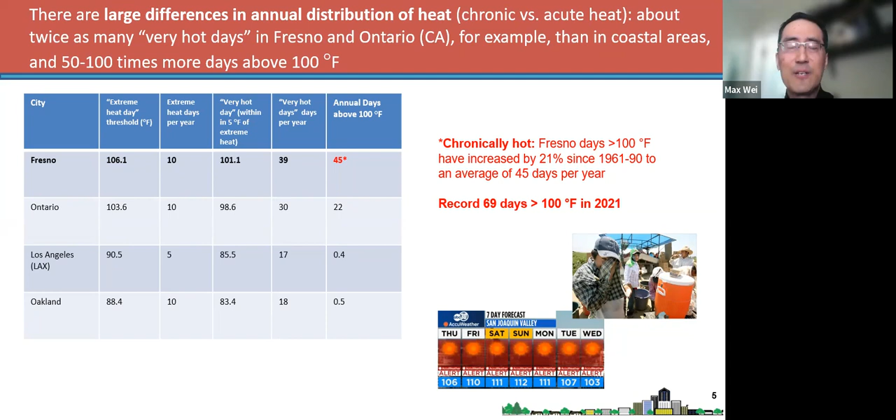So the good news is that we can implement preventative strategies now to mitigate heat health impacts. And the Cal-THRIVES project has developed a toolkit for local and state stakeholders. In the short term, this can include increasing awareness of heat-related vulnerability and identification of areas that are vulnerable to extreme heat events. And in the nearer to medium term, we can remedy the built environment.

That is to say, we can retrofit buildings with more insulation and/or more energy efficient cooling equipment, and perhaps increases to the tree canopy. We can also try to enhance community and home cooling programs. Specifically, I'm referring to community cooling centers, which are publicly available shelters, which might be a library or community center, which are open to the public and air conditioned, that people might turn to if they lack sufficient cooling in their home.

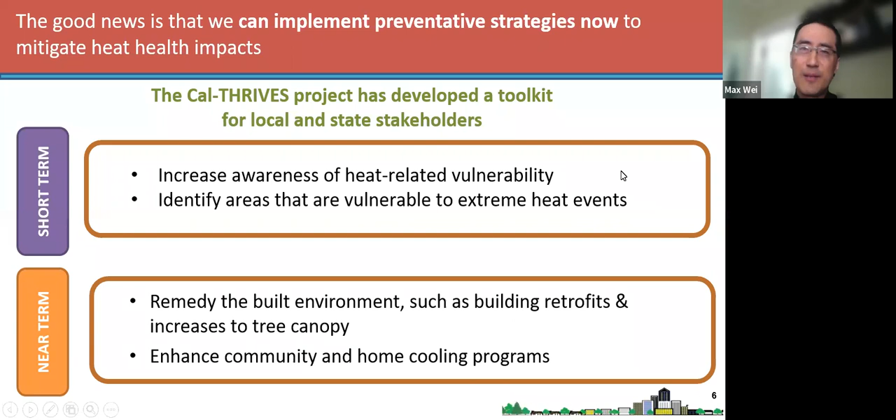So our approach is to incorporate both community inputs and science. Community engagement is an important piece of the project. I'll discuss that a little bit more. That can inform, for example, how cooling centers could become more optimal. And we also included neighborhood scale building modeling and outdoor measure modeling, which I'll describe in a moment.

But all these factors feed into our heat resilience toolkit output, which includes many items, including a community cooling guide, fact sheets. I won't read all these items, but they also include policy and program recommendations. I won't have time to get to all of these, but I just wanted to mention that we have several items of the heat resilience toolkit.

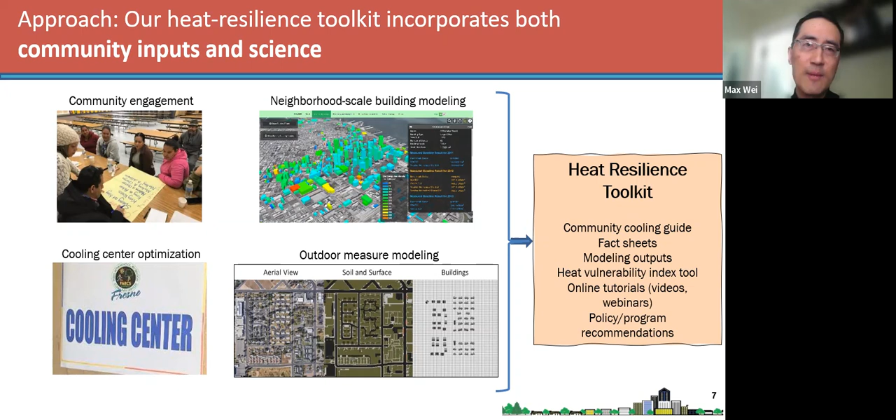So community engagement, as I mentioned, was a very important and key part of the project to help us understand how residents cope with extreme heat, to better understand residents' needs, preferences, and barriers to proposed cooling strategies, such as going to cooling centers or installing solar window films, for example, and also to inform our modeling assumptions, for example, what types of cooling equipment and how old is their air conditioner or swamp cooler.

To do this, we employed 4 primary outreach methods. This was led by Susan Mazur-Stoneman, our social scientist, and also West Fresno Family Resource Center, our community-based organization partner based in Fresno. So we had 2 community meetings, one at the beginning and one at the end of the project, 4 focus groups, 11 in-home interviews, which are very in-depth. And I should say that the focus groups and in-home interviews were conducted just before COVID. But after that, we primarily went to remote outreach with about 88 phone interviews.

So we modeled both active and passive measures, and the passive indoor cooling measures were modeled in a worst case heat wave with and without grid power available. They included several window treatments, such as window blinds and the aforementioned solar control window films, which provide some tinting to your windows. And then also some cool surfaces and roof treatments, including cool roof, which basically provides greater reflectivity of sunlight from your roof or wall. Also roof insulation and radiant barrier, and also natural ventilation, which is basically opening windows and/or doors to admit cooler air, primarily at night.

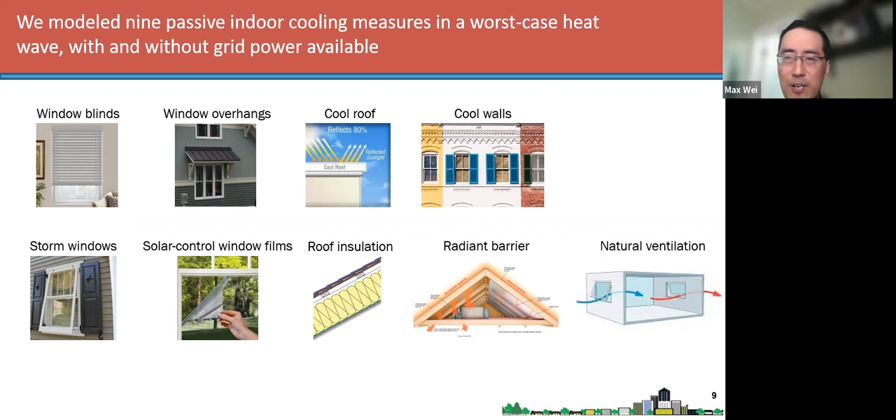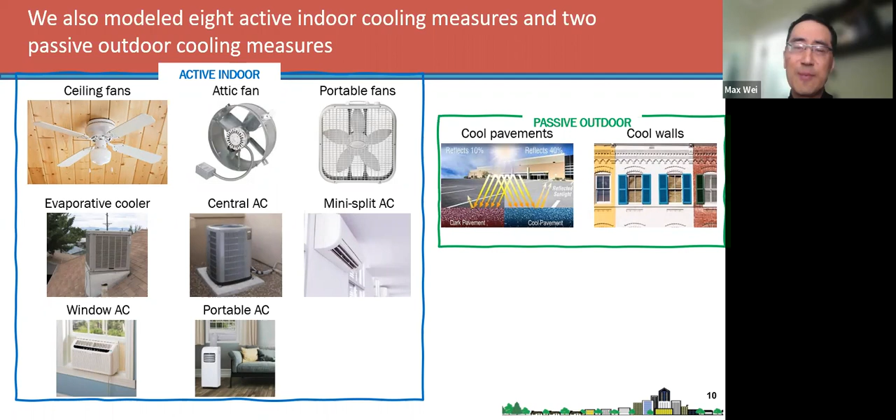We modeled 8 active indoor cooling measures additionally, and 2 passive outdoor cooling measures. So the active cooling measures included fans and evaporative or swamp coolers, and 4 different types of air conditioners as shown. I won't really be discussing the outdoor modeling as much today, but we also modeled cool pavements and cool walls, and their impact, for example, on outdoor near-surface air temperature.

For the building modeling, we utilized a neighborhood scale building modeling tool developed at LBL called CityBES. It's available at this website below. It's an open tool for neighborhood to urban scale or district scale modeling, which is to say that it has the capability to model an ensemble of buildings, like for a commercial area, all of the small office buildings, for example, or all of the taller buildings, or all of those buildings together.

And so for Fresno, we have developed a residential building data set for several neighborhoods in Southwest Fresno. For example, you can measure an energy efficiency measure such as insulation or more energy efficient HVAC equipment. And you can look across the set of buildings that get that upgrade to look at the energy savings and the overall energy costs. It can also look at interactions like the shading of a building that might affect the solar PV output from another building.

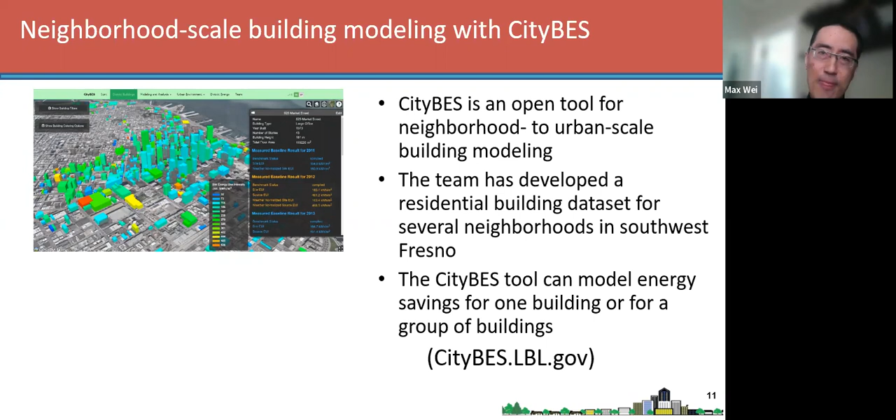So the overall workflow for the two scales of modeling is shown here, which is pretty detailed, and I'm primarily showing this just for reference, so I probably won't go into great detail here. But essentially, we have two scales of modeling at the prototype or individual building level, so single family, 1 level and 2 level, and multifamily 8-unit prototype buildings. And then we aggregate those to model a neighborhood.

So this particular neighborhood is a residential neighborhood, underserved, disadvantaged neighborhood in Southwest Fresno. It's the King Elementary School District, and it's about 500 households. And so we first developed the prototype buildings with inputs from surveys and weather data, creating baseline models. Then we have measures like insulation or passive or active cooling measures. We run those simulations for passive measures with grid on, and then we also look at grid off.

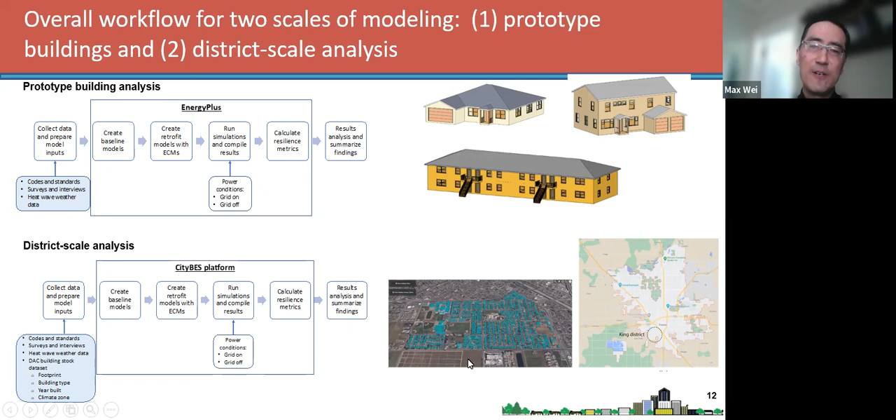And then we calculate the outputs in the form of resilience, which are basically health or safety metrics, and then we summarize our results. And we do that at the district scale, just to say at the scale of all of the buildings in the neighborhood.

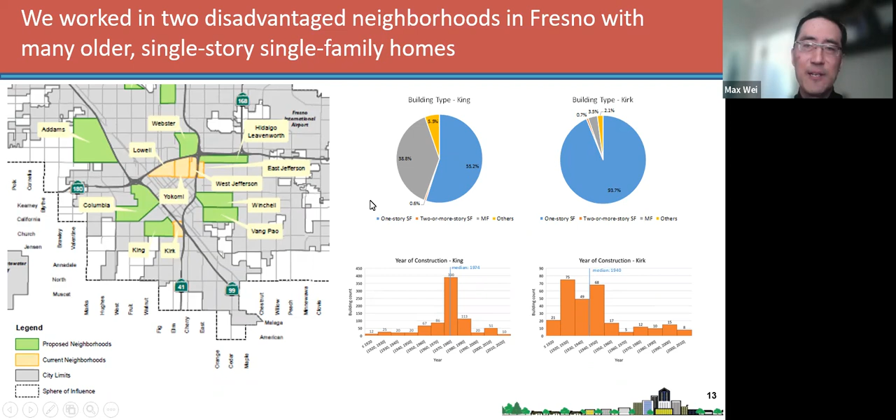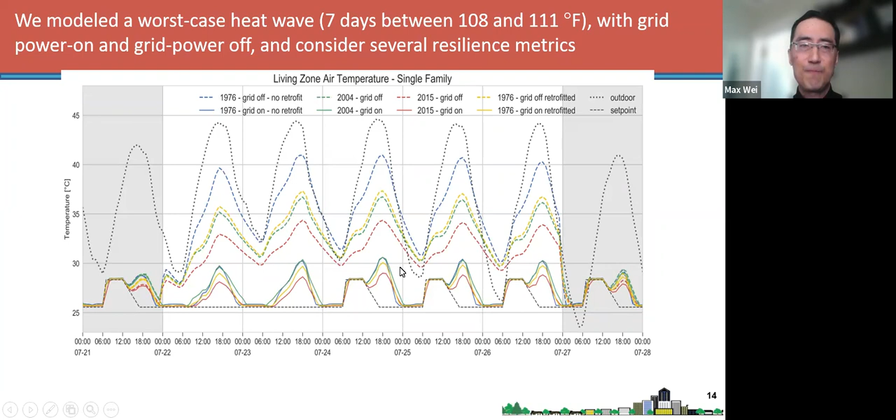Okay, so just want to mention what the output metric was. So we used a variety of resilience metrics, again, modeled during worst case heat wave as a function of the modeled measure. And these included 4 resilience metrics, including unmet degree hours, heat index caution hours, SET, and PMV. And all of these are slightly different, and they consider different metrics.

So for example, unmet degree hours just considers the indoor air temperature, while heat index considers both the air temperature and the relative humidity, while the last 2 are a little bit more comprehensive and include other factors, including mean radiant temperature, airspeed, metabolism, and clothing. Each of these metrics, however, have some limitations, as you might imagine, and there are other metrics like wet bulb globe temperature is another one.

And we've noted some of those limitations here, but as you include more parameters, it becomes probably a better overall indicator. And there are also thresholds that we've taken for health and safety. So for example, for heat index, you may have seen different levels of safety, so caution level, extreme caution, danger, and extreme danger, and similar types of thresholds for comfort and safety are shown for the other metrics.

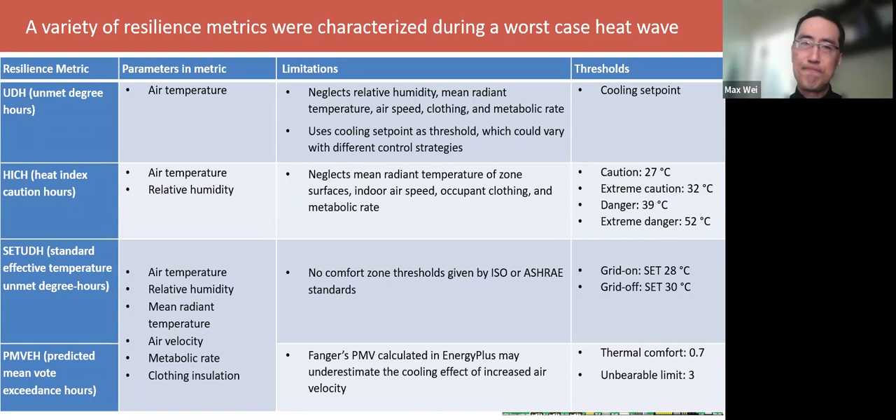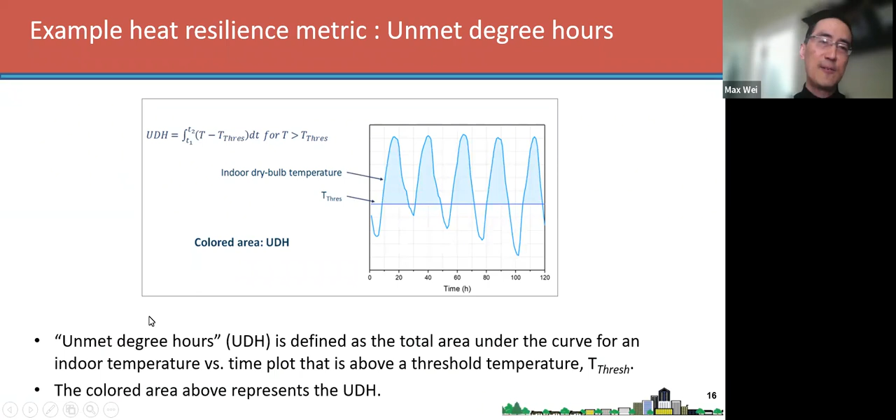All right, so this is just an example of what unmet degree hour means. It's essentially just the total area under the curve for an indoor temperature, which is the blue curve, versus its threshold. So it's the integral or the area, and that is the UDH, the unmet degree hours. So you want this to be as small as possible.

All right, so we found several key vulnerabilities for residents in disadvantaged communities in South Fresno. So over 70% reported feeling uncomfortably hot at home very often during the summer. And residents on the top floors and those residents in units that lack air conditioning, which are about 15% of households, are especially vulnerable. So we saw old and inefficient window air conditioners, for example, and many homes just have a swamp cooler, which is really insufficient to provide adequate cooling during heat waves.

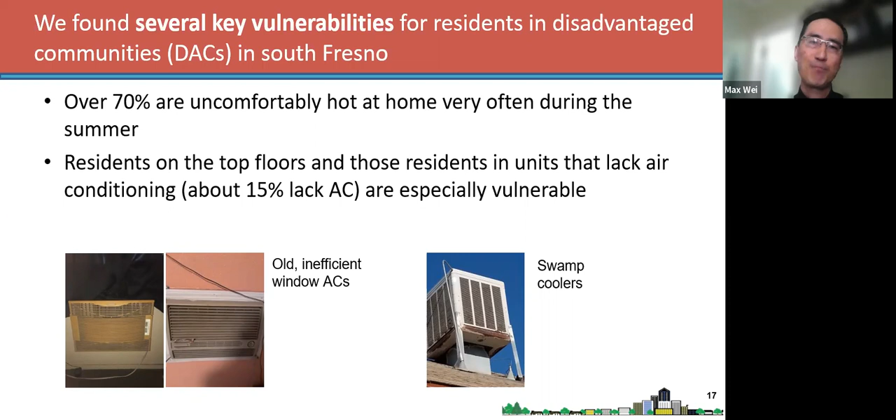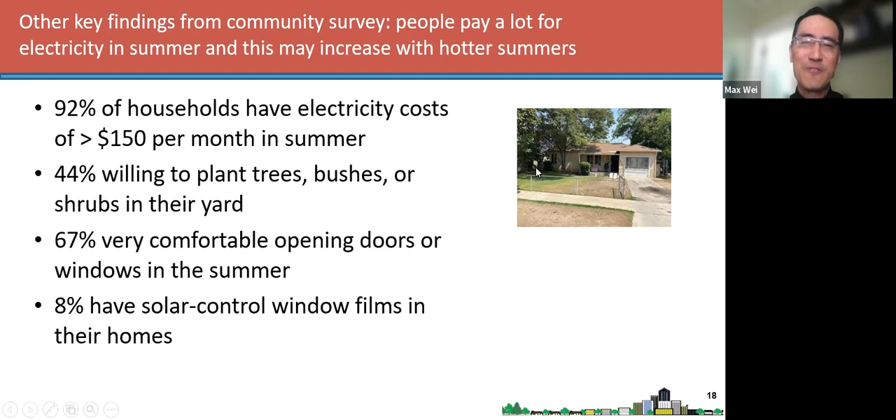Just some other key findings are listed here in terms of their willingness to plant trees, their comfort level with opening doors and windows for natural ventilation. But one key point is that, as it's been pointed out in the past, the electricity bills and the utility bills in general are very high in Fresno because of the extreme temperatures. And this may increase with hotter summers. And I say may because if people use more air conditioning because it's hotter, it will definitely increase their bills. But if they can't afford to pay it, they may not take the step of increasing their air conditioning use, even though it's much hotter.

All right, so in terms of cooling centers, we found that most people prefer to stay at home during heat waves rather than going to another cooled environment, such as a community cooling center, for a variety of reasons. So findings from Susan and her team: most residents prefer to balance mild discomfort from heat for the privacy and security of being at home.

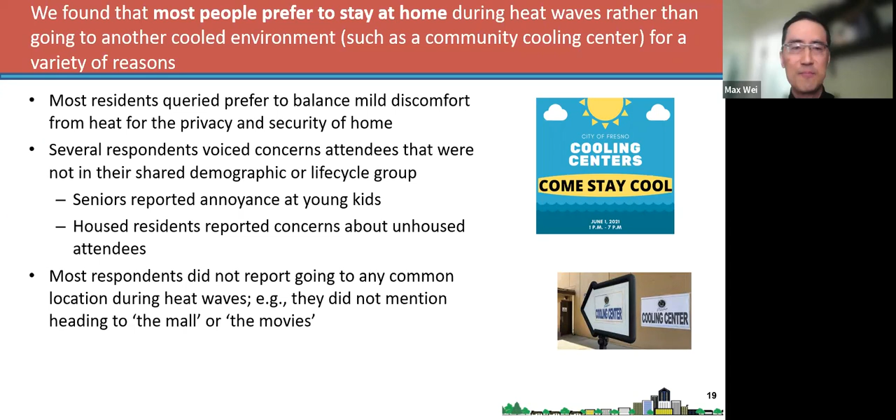And several respondents voiced concerns about the demographic or the life cycle group that was in the center, such as seniors being annoyed at rambunctious, noisy kids, or housed residents being concerned about homeless people there. And so there was no real most common answer or silver bullet. Most respondents, for example, did not report going to any common locations, such as the mall or the movies, which also have a cost.

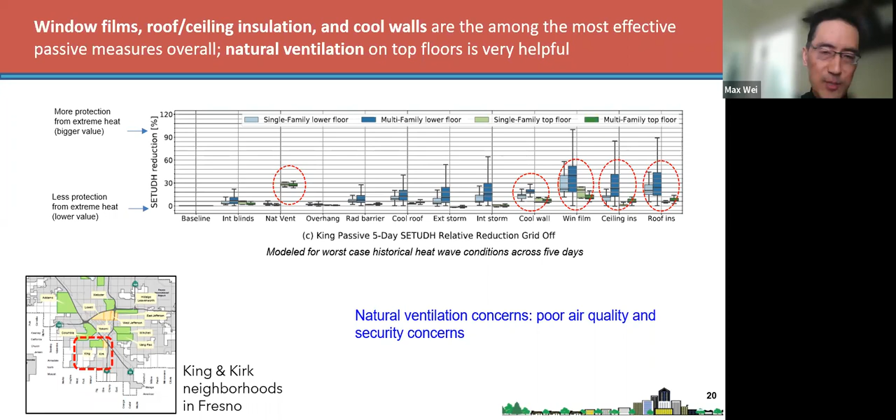But one thing to note again is that natural ventilation may have some concerns if there's poor air quality, and there's chronically bad air quality in Fresno, and also some residents voiced security concerns.

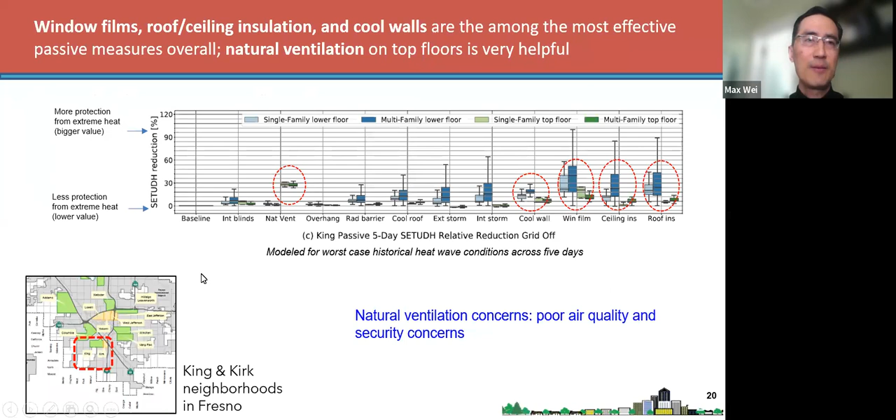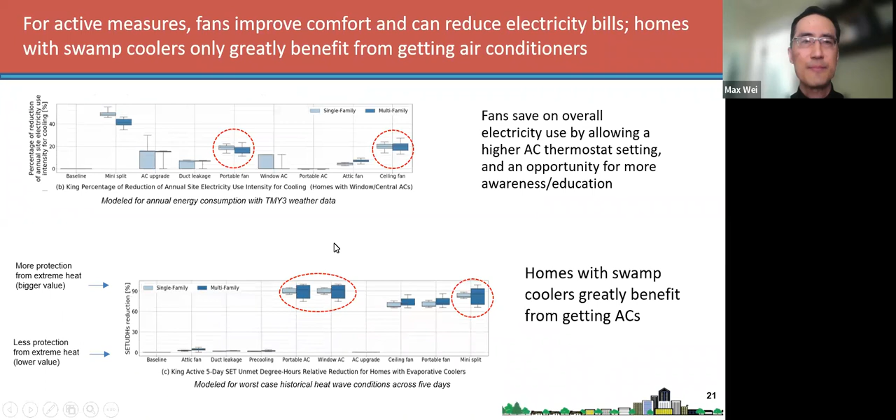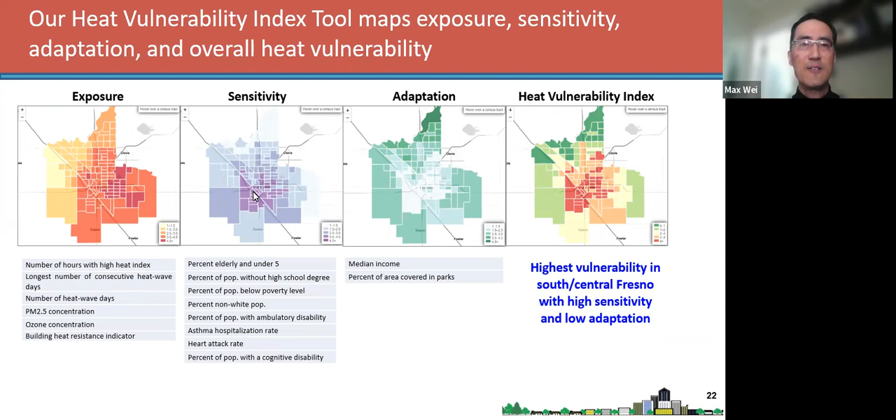All right, so we also developed a heat vulnerability index tool, which maps exposure, sensitivity, and adaptation into an overall heat vulnerability index by census block, which are the shapes here. I won't read all the inputs, but they're shown here. The bottom line is that we see the highest vulnerability in South and Central Fresno. And again, our study is based in Southwest Fresno. You can see there's a higher sensitivity and a lower adaptation capacity in general in those areas.

I will just add that we do have a few journal and conference papers available at the calthrives.lbl.gov site, including a paper on passive cooling designs led by Kaiyu Sun, and the heat vulnerability index tool led by Yujia Xu. There is also a report or presentation from Susan Mazur-Stommen on outreach results in Fresno from 2020.

Online tools, I've mentioned a couple already, CityBES and the heat vulnerability index tool. We also have 2 or 3 videos describing those. And then finally, policy, program, and R&D recommendations. So I'll just give a glimpse of all of those.

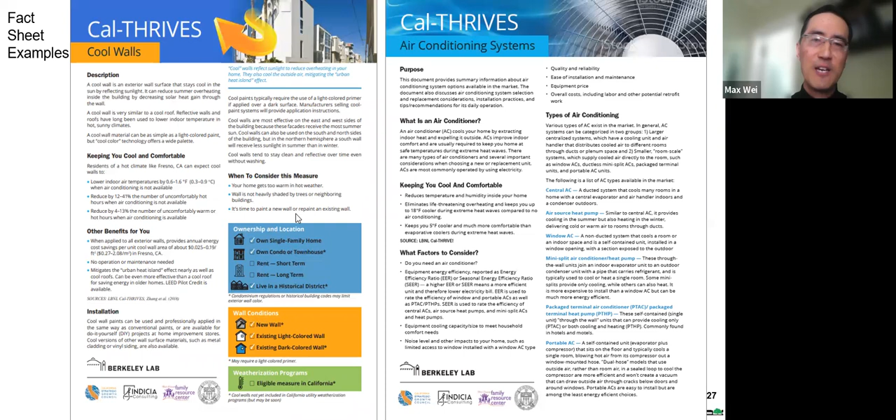These are also 2 pages, and this air conditioning one is a little bit longer, about 5 pages. But examples of the fact sheets for cool walls and air conditioning systems. And these are meant for perhaps very motivated DIY do-it-yourselfers, or perhaps NGOs trying to provide tools or information, more technical information, but just providing description and some tips and some caveats and types of air conditioner and so forth.

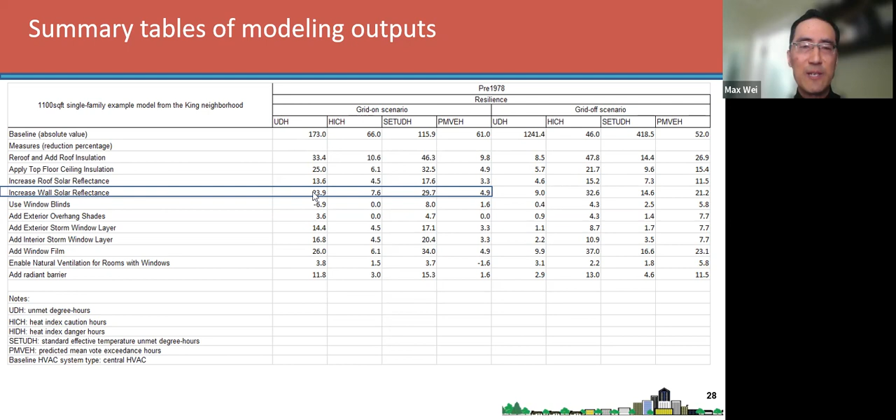And then for the summary table of modeling outputs, this is just a summary table that we have for both single and multifamily, and at the level of a single building and also at the neighborhood level. So for example, with the grid on, this is a baseline metric for unmet degree hours, and all these numbers refer to the percentage reduction as a function of the cooling measure. So increasing the wall solar reflectance can reduce the unmet degree hours by about 34%, for example. So this is just for tabulation for reference purposes.

We also have online tools and videos for the CityBES tool with the link shown here, and also for the HVI tool with the link shown there.

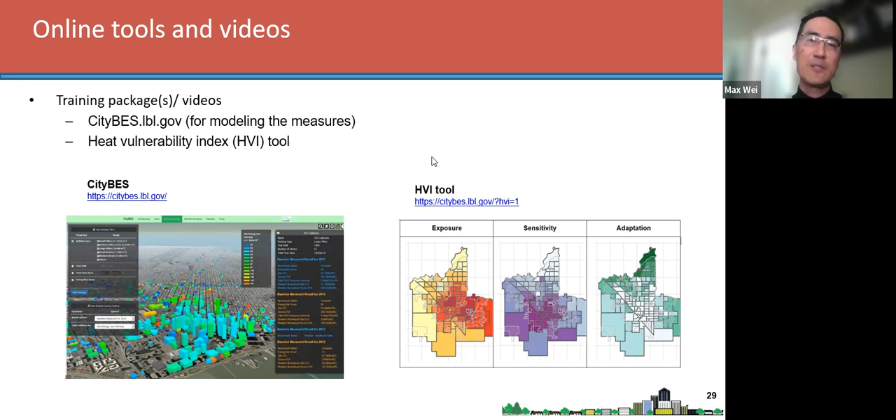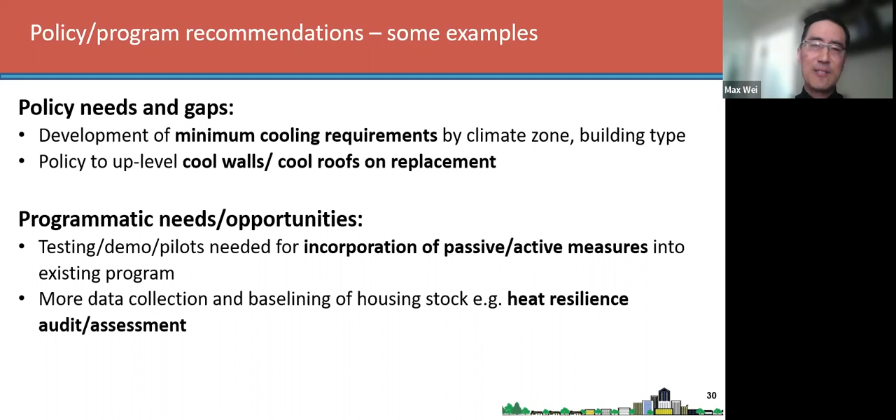And then at the program level, testing, demonstration, and pilots, which can potentially be incorporated into existing programs of weatherization, but definitely I think more data collection is needed for that, and also finding out what works best for residents. And then similarly, I think there's more scope for data collection and baselining, for example, developing a heat resilience audit and assessment, similar to an energy efficiency assessment.

Then for R&D, just mention a few items here, including non-energy metric development, and these can cover things like health, productivity, educational outcomes. And the quantification of these impacts is important to support code and standards development to include something like resilience to extreme heat. Monitoring of installed measures and their effectiveness is important as we try to deploy some of these promising measures. And also the development of more comprehensive climate assessments.

So for example, we have a very well-developed checklist and audit procedure for energy efficiency, and it might be very valuable to try to consolidate that with an audit for heat resilience. And then there's definitely the need for more decision support tools to support larger scale deployment. So you can think of the Home Energy Saver, if folks are familiar with that, for energy efficiency as an example, that maybe could be extended to something for extreme heat, for more climate resilient buildings.

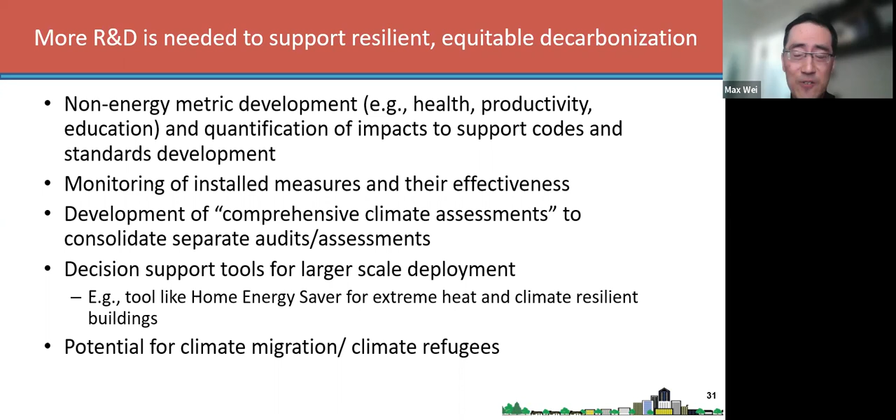And then finally, I think if there is an intensification of extreme heat, we should also think about the potential for more climate migration, which might be happening to a small extent today, to, in the worst case, more climate refugees within the state. So I'll just summarize very quickly.

Methods have been developed and implemented to quantify the heat resilience benefits of cooling measures in a DAC, both at the building level and the neighborhood scale. Several toolkit items have been developed to help residents in disadvantaged communities to better cope with extreme heat. And finally, we're actively disseminating the project results with policymakers and plan more outreach to other communities in the Central Valley beyond Fresno.